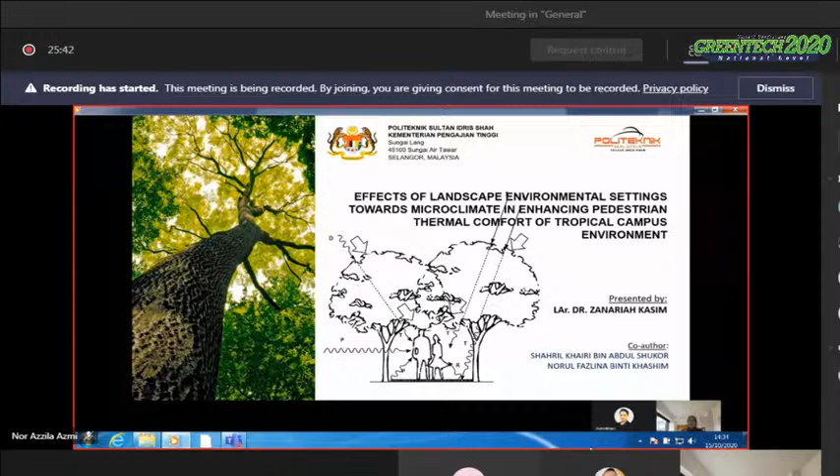I will be presenting our study titled Effects of Landscape Environmental Settings Toward Microclimates in Enhancing Pedestrian Thermal Comfort of Tropical Campus Environment. This study is conducted by me together with my friends Encik Shahril Khairi and Wan Norul Fazlina. The outline of my presentation: I will start with introduction, followed by literature review, methodology, and finally the results and conclusion.

For the introduction, this study is related to three issues. Issue number one is on campus and city sustainability. Issue number two is on health and well-being of the campus community. The third is on how to promote pedestrian thermal comfort.

Because if pedestrians are comfortable, we believe we can promote walking among the campus community. In our tropical climates, hot and humid conditions are always a reason why walking is not popular among the campus community. Promoting walking to the campus community or city dwellers can reduce demand on fuel transportation, and also reduce the problem of traffic jams, especially in city centers.

According to Buchu 2013, she also highlighted that the idea of promoting walking among city dwellers will increase business demand in the area.

For the literature review, this study focuses on two main constructs: pedestrian thermal comfort and comfortable walking distance. Pedestrian thermal comfort is related to human thermal comfort.

According to Potchter et al. 2018, human thermal comfort is determined by the overall thermal comfort and the assessment of environmental quality. It does not depend only on physical parameters, because our body's psychological and physiological responses also respond to the environment.

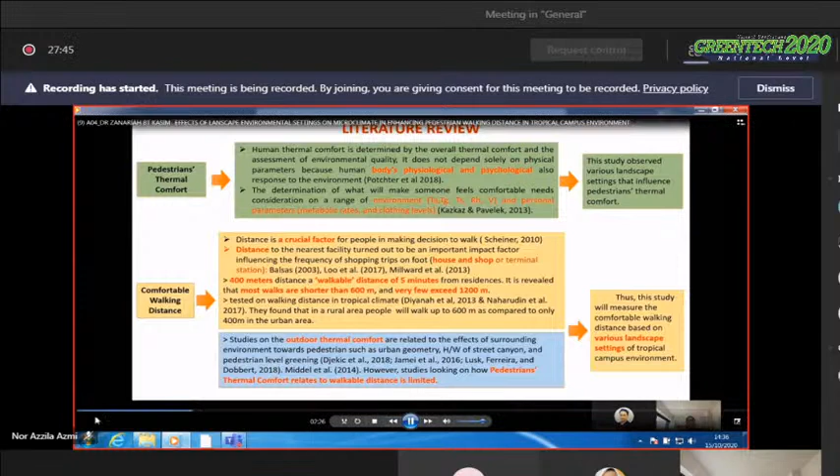Kazkaz and Pavelek 2013 revealed that determining what makes someone feel comfortable requires consideration of a range of environmental factors - meaning microclimate parameters such as air temperature, globe temperature, surface temperature, relative humidity and wind velocity - and personal parameters, which are our metabolic rates and clothing level, meaning what we are wearing at the time, which also affects the feeling of comfort.

Therefore, this study will observe various landscape settings that influence pedestrian thermal comfort. For comfortable walking distance, it is actually a crucial factor for people in deciding whether to walk or choose transportation.

Studies by Balsas 2003, Loo et al. 2017, and Millward et al. 2013 found that distance to the nearest facility turned out to be an important factor influencing the frequency of shopping trips on foot, meaning distance is very crucial.

They found and agreed that 400 meters is a walkable distance, similar to 5 minutes walking from the house to any destination. It's revealed that most walking distances are shorter than 600 meters, and very few exceed 1,200 meters.

That study was done not in a tropical climate, but in a temperate country. In our own country, studies on walking distance by Diyanah et al. 2013 and Naharudin et al. 2017 found that in rural areas people will walk up to 600 meters, compared to only 400 meters in urban areas - meaning that the environment affects the distance and comfort of walking for pedestrians.

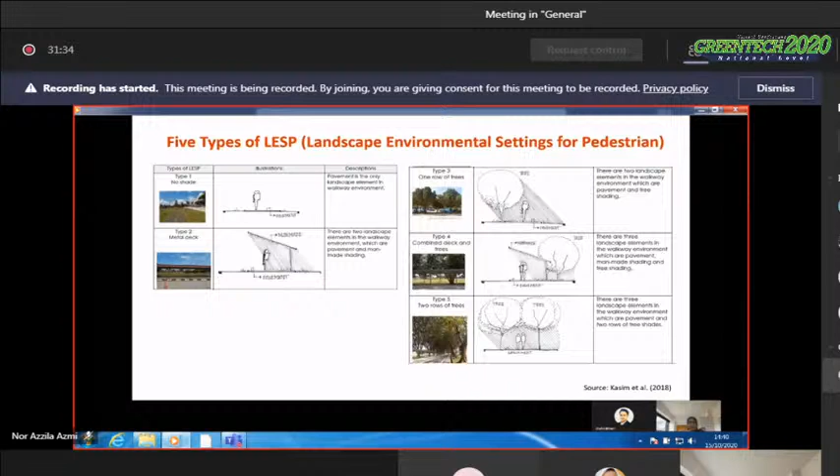After identifying 5 types of LESP in 2018, Kasim et al. in 2019 did field measurements of 5 microclimatic parameters, which are air temperature, surface temperature, globe temperature, wind velocity, and relative humidity at all 5 types of LESP in a campus in Malaysia. They identified the location for type 1, type 2, type 3, type 4 and type 5, and did measurements using portable instruments to measure all the 5 microclimate parameters in these various types of LESP.

Their result indicated that different types of LESP have different impacts on pedestrian thermal comfort. The best landscape type for pedestrian thermal comfort is LESP type 5, which is the walkway that has 2 rows of trees on both sides.

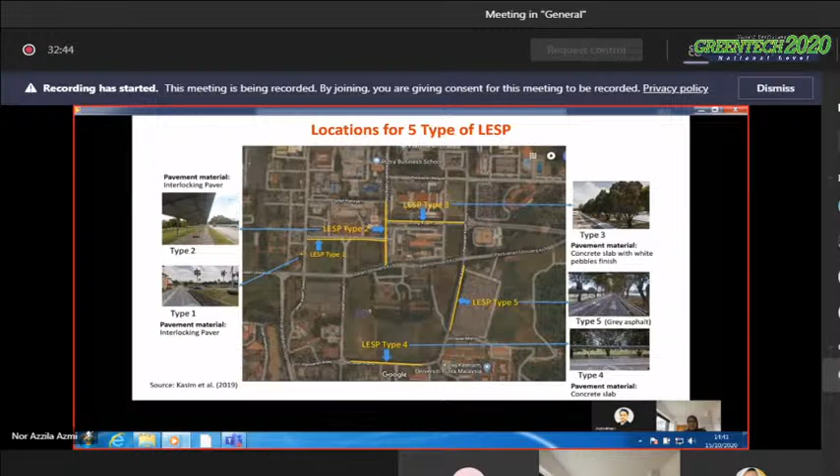For the research methodology of this study, we did a field survey in 5 types of LESP. The field survey was conducted in a UC campus in Malaysia under 5 types of LESP based on Kasim et al. 2018 and 2019. The total number of participants was 57, who had given written consent to cooperate in this study. Participants started between 12 to 3 p.m., which is the hottest time of the day in our country.

They answer items in section A before starting walking, then walk to the first checkpoint to answer items in section B, and repeat answering section B at the next checkpoint. Participants walk along the 250-meter walkway back and forth until the survey ends, since the length of the walkway for the 5 types of LESP was only 250 meters. The example location of checkpoints in the walkway is shown in the slide. The survey ended when participants decided to stop walking at any checkpoint where they felt uncomfortable.

The survey question in section B has 4 questions, measuring thermal rate, thermal comfort, walking comfort, and walking distance.

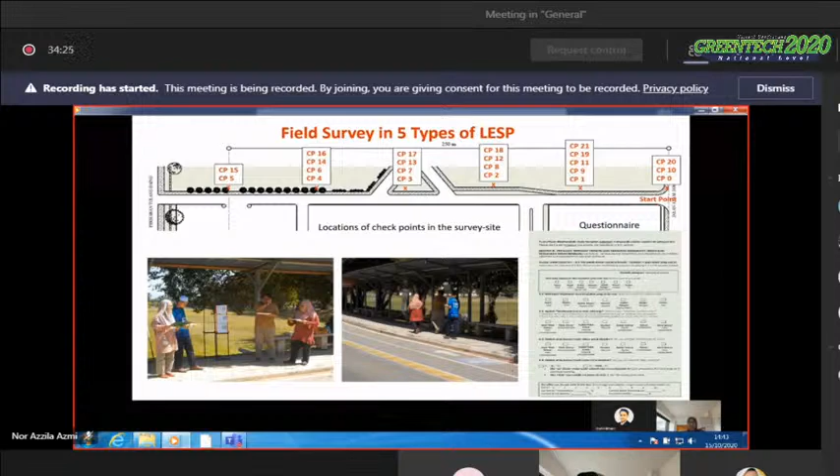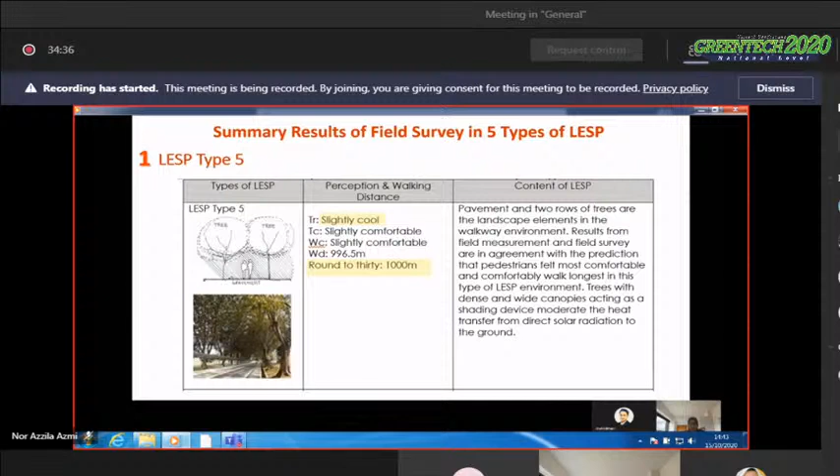This is the summary result of the survey in 5 types of LESP. The influence of the 5 types of LESP on pedestrian thermal comfort and comfortable walking distance can be clearly seen from the result. The LESP ranking in terms of pedestrian thermal comfort and comfortable walking distance in ascending order is: type 1, followed by type 4, type 2, type 3, and type 5. I will explain each type afterwards.

In Type 5, as I already explained, in the walkway environment there is pavement and 2 rows of trees on the left and right, and the trees are very dense. So pavement and 2 rows of trees are the landscape elements in the walkway environment. The result from field measurement and field survey are in agreement with the prediction that pedestrians felt most comfortable and walked longest comfortably in this type of LESP.

Trees with dense and wide canopies act as a shading device, moderating the heat transfer from direct solar radiation to the ground. So for perception and walking distance, participants felt slightly cool, and for thermal rate and thermal comfort, they felt slightly comfortable.

Then slightly comfortable also for walking comfort, and the distance for comfortable walking distance is 996.5 meters, and if we round it, it's almost 1,000 meters or 1 kilometer.

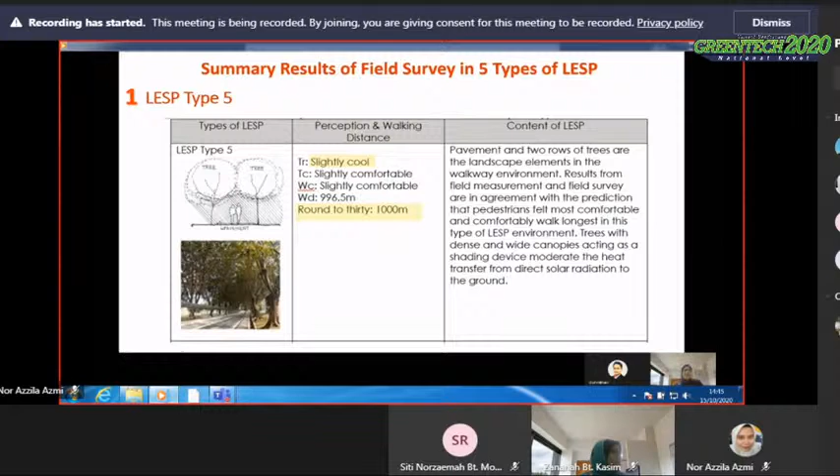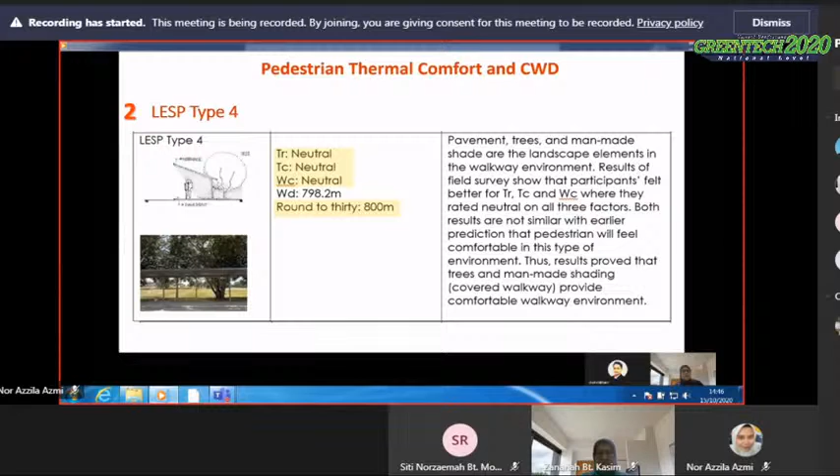Ranking number 3 is LESP type 2, which is pavement and man-made shade as landscape elements. Results indicate man-made shading, meaning covered walkway, does provide a comfortable walkway environment, as participants felt neutral for thermal comfort and walking comfort. The comfortable walking distance for LESP type 2 is 650 meters.

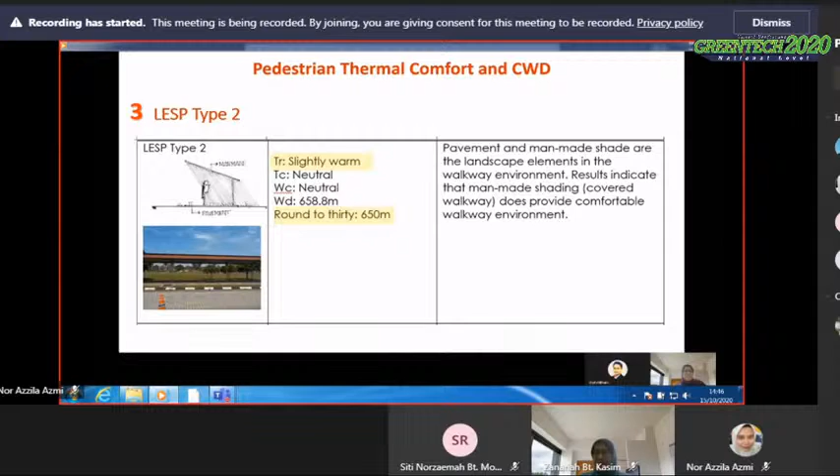The fourth ranking is LESP type 3, which is pavement and trees as landscape elements. Results from the field survey show participants felt neutral for thermal comfort and walking comfort, meaning they feel comfortable, and the walking distance for this LESP type 3 is 630 meters.

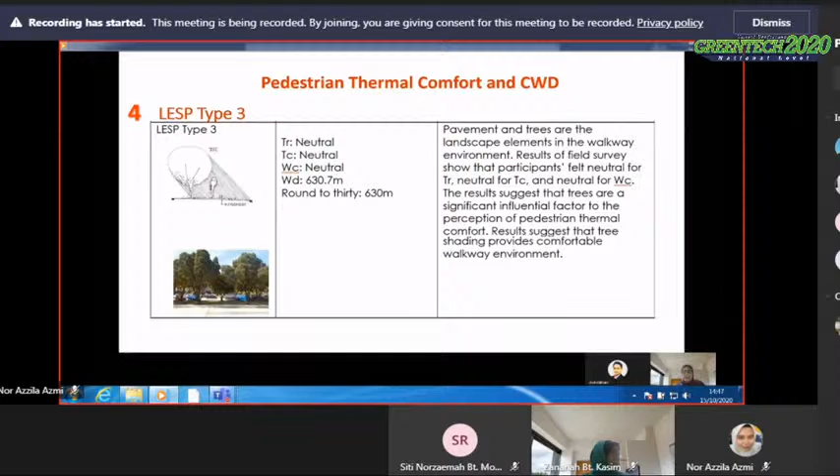Finally, the last ranking is LESP type 1, where pavement is the only landscape element in the walkway environment. Results indicate this type creates a hot environment leading to heat stress and does not promote walking comfort to pedestrians. So designers should avoid providing this kind of walkway environment, type 1, either in campus or in the city.

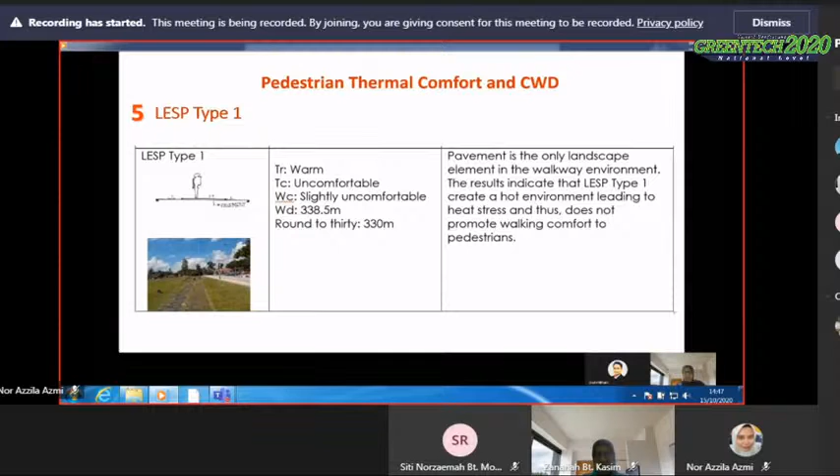Conclusion: it is important to modify solar radiation in the walkway environment by having continuous shade, either from trees or man-made shade, and it's good if we can provide man-made shade together with tree shade along the walkway. Man-made shading structures can only provide full shade, but heat reflected from their surfaces can be quite considerable, compared to trees which provide additional cooling effect as they reduce radiation and provide additional cooling advantage through their evapotranspiration process.

The findings of this study may offer solutions to issues and problems in enhancing pedestrian thermal comfort. In addition, they may provide some contribution to the literature in the field of landscape architecture, urban design, and related fields of study.

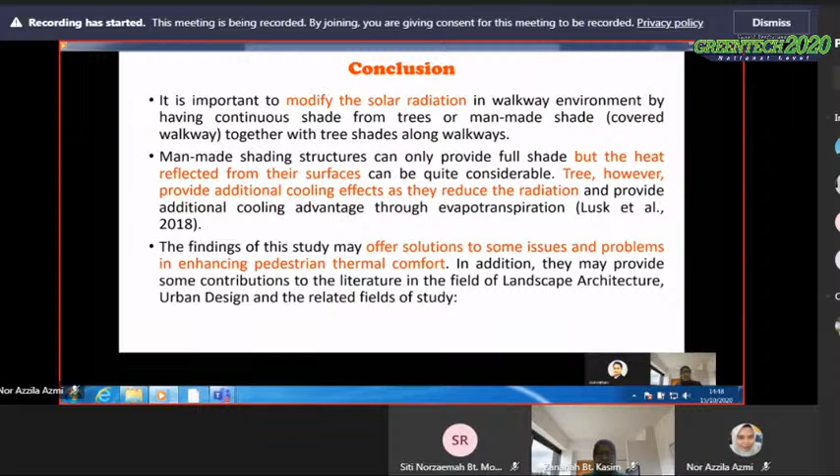For example, number 1 is identification. This study, based on the study by Kasim 2018-19, revealed the identification of Landscape Environmental Setting for Pedestrian (LESP) types in tropical campus environments. Number 2, this study established the relationship between landscape environmental settings and pedestrian thermal comfort.

Number 3, our study also established the relationships between pedestrian thermal comfort and comfortable walking distance in all types of LESP. And finally, this study has expanded the guidelines in providing pedestrian thermal comfort for pedestrian walkways in tropical climates. With that, I end my presentation, and thank you very much.

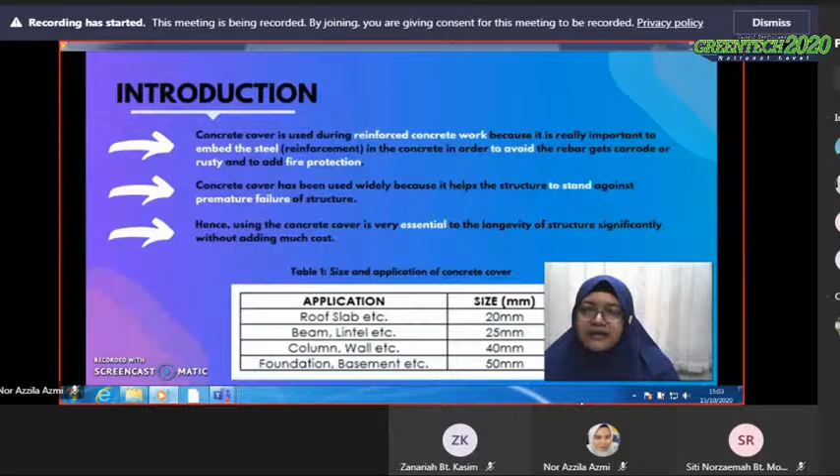In the paddy milling process, approximately 78% by weight is received as rice and the rest, about 22%, as husk. The unburned rice husk contains about 50% cellulose, 25 to 30% lignin and 15 to 20% silica, as reported by Ismail, 1996.

Having pozzolanic properties not only gives technical advantage to the resulting concrete, but it also reduces cement consumption. Thus, the resulting benefits in terms of energy saving, economy, environmental protection, and conservation of resources will be substantial.

Al Gunduz, 2008, stated that the manufacture of concrete cover blocks should comply with international requirements specifying the product's particular properties. The use of rice husk in the manufacture of polymer composites therefore attracts significant interest from many rice-producing countries in the world. It is one of the most productive agricultural wastes.

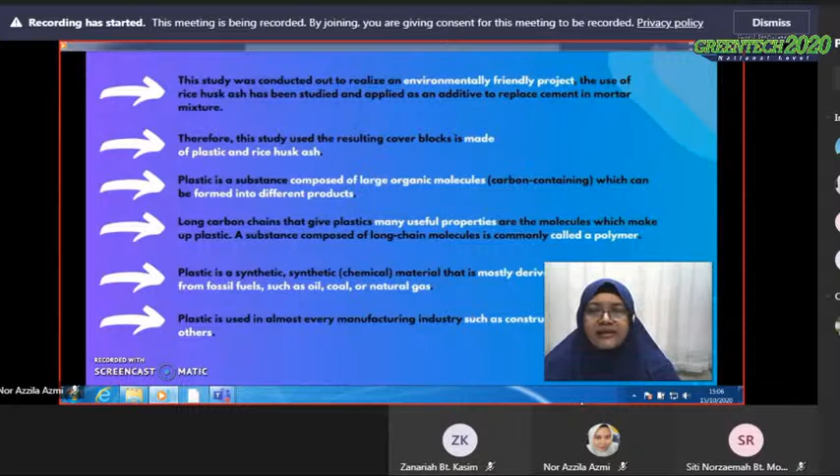And for materials, rice husk ash is a highly reactive pozzolanic additive in cement and concrete and can be used for the purpose of strength acceleration in concrete mixtures containing less reactive pozzolans such as fly ash, from the study conducted by Mehta, 1989. The main raw material used in this study is carbon rice husk ash, which has been ground into fine particles. It is found that rice husk ash is ideal for use as a cement substitute because it contains a high silica content and can minimize the waste dumping issue, from the study conducted by Rosley, 2017.

The use of rice husk ash as partial Portland cement replacement has given impetus to research and development of methods for producing energy and other useful industrial by-products, as reported by Kartini, 2010. RHA is a general term used to describe the type of ash produced from burning rice husks. Rice husks are the shell produced during the dehusking operation of paddy rice.

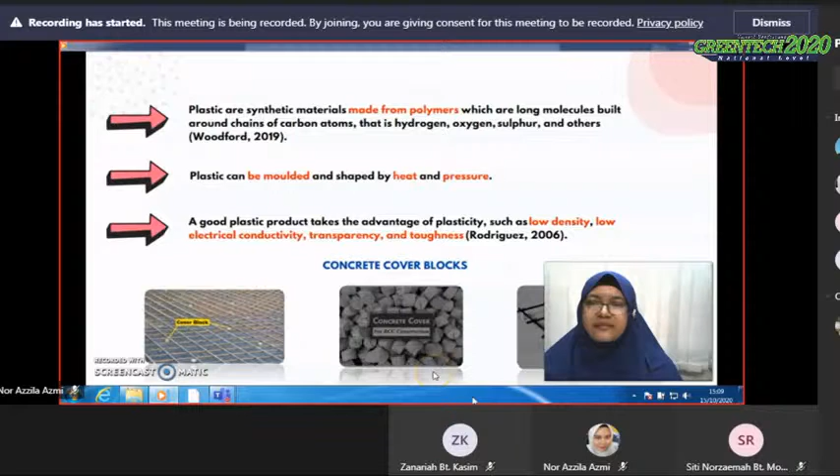Okay, the third one is methods. The samples for each RHA plastic cover block and cement concrete cover were made before conducting the test. The materials used to produce RHA plastic cover blocks are 305 mm by 305 mm HDPE plastic bags, cooking oil and carbon rice husk ash. The apparatus required are a cooking pot, spatula, PVC pipe cut into the required height, and a tray. To produce one sample of RHA plastic cover block, prepare 12 sheets of HDPE plastic bag and 20 grams of carbon RHA.

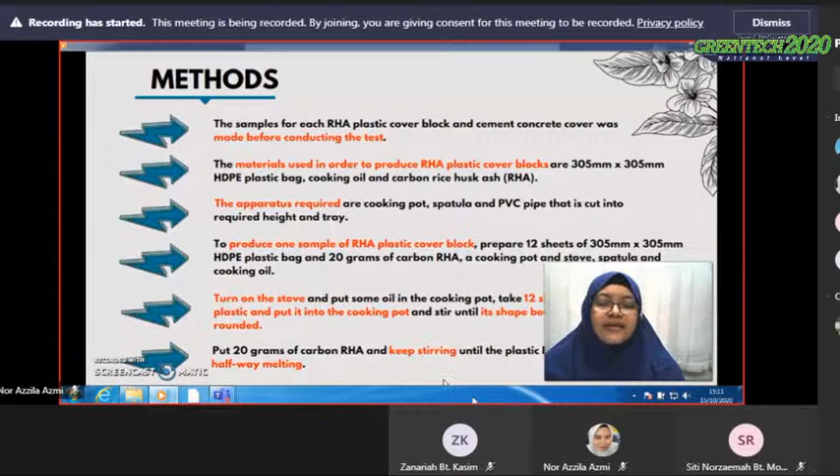Turn on the stove and put some oil in the cooking pot. Take 12 sheets of HDPE plastic and put them into the cooking pot. Stir until its shape becomes small and rounded. Put 20 grams of carbon RHA and keep stirring until the plastic RHA becomes halfway melted. The process takes only 3 to 5 minutes on low heat.

Turn off the heat and put the plastic RHA into PVC molds and let it rest and shape into a round shape. It will harden after 5 minutes of rest. All tests are performed on RHA plastic cover blocks of similar dimension. To produce accurate dimension and weight is almost impossible due to its plastic properties.

The total number of RHA plastic cover block samples produced for compressive strength tests and water absorption tests is 6 samples per test, and 3 samples are used per week. The total days of testing are 14 days or 2 weeks. The test methods are carried out, but due to the lack of a standard for the concrete cover, the minimum size of the concrete cover is 50 mm.

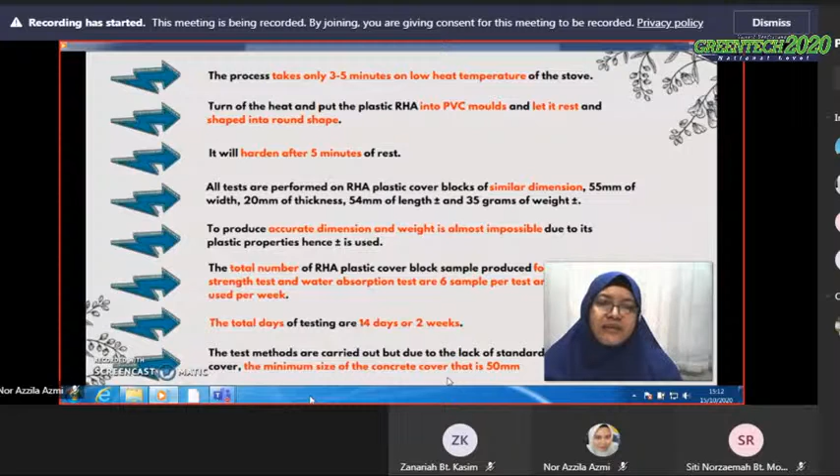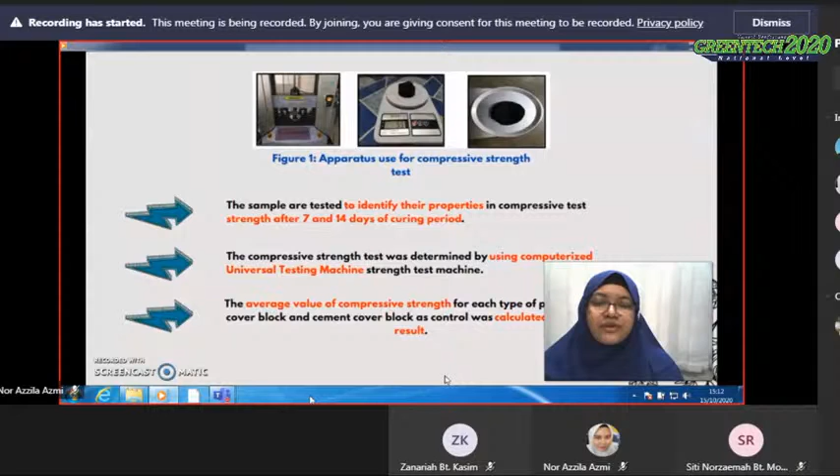Figure 1 shows the apparatus used for the compressive strength test. The samples are tested to identify their compressive strength after 7 and 14 days of curing period. The compressive strength was determined using a computerized universal testing machine. The average value of compressive strength for each type of plastic RHA cover blocks and cement cover blocks as control was calculated after the result.

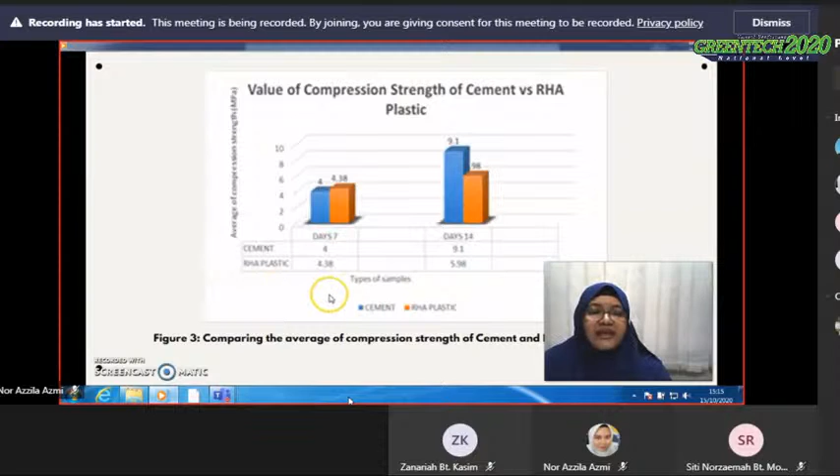Figure 3 compares the average compression strength of cement and RHA plastic. The result for 14 days showed the compressive strength of RHA plastic is lower than cement, with the value 5.98 MPa. This result showed cement has a better compressive strength when cured.

Reported by Ikpong 1993, on various grades of concrete and with varying levels of cement substitution by volume, the compressive strength increased with age but decreased with RHA content.

In conclusion, this study was carried out to evaluate the significance of utilizing agricultural and waste materials such as rice husk ash and waste plastic bags and converting them into construction material, that is RHA plastic cover blocks, something useful for the construction industry.